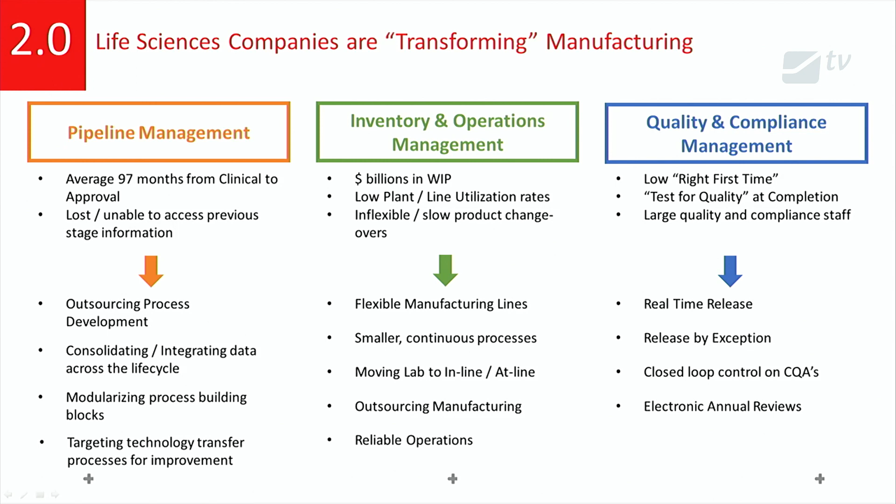I put this in just to give you an idea of what we face from an automation perspective. All of this is pretty much - I don't know whether you've heard of or are aware of Industry 4.0 or digitalization - that plays a large part in automation for us now and in the future. It's very broad, so no one person will stand here and say we understand all of this, we know it all, we can do it all, and we deliver it all. But there are key contributing factors in there.

So data or Pharma 4.0, around the interconnectivity of devices, around collecting data, around vertical and horizontal integration of data, around smart visualization, so how you can actually see and use data and information. These are all integral parts of Pharma 4.0.

Virtual reality, digital twin, being able to replicate things in a digital environment or superimpose digital onto the physical world, using artificial intelligence, knowledge-based systems, self-learning systems.

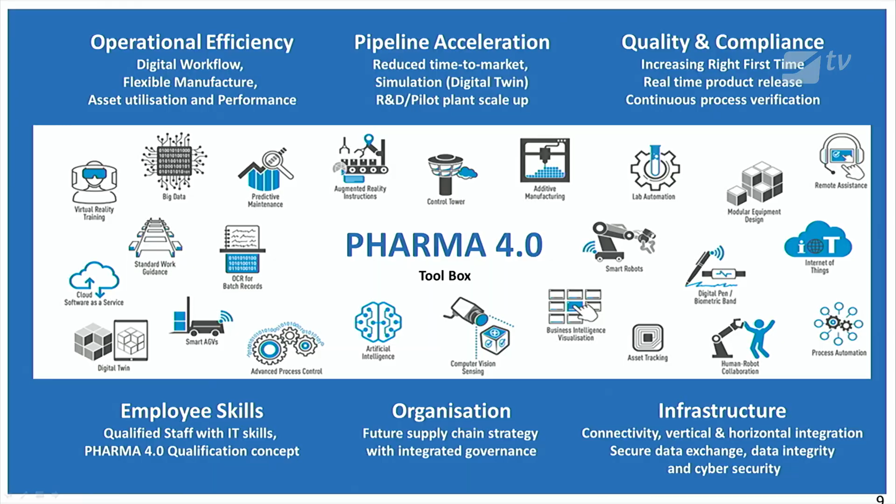They're all factors, they're all enabling technologies, but ultimately they're supporting some of the key drivers that our industry sees. Operational efficiency, so using data, digital workflows, around flexible manufacturing, how we can, and I'll touch on this a little bit later, around asset utilization.

Being able to simulate and use digital asset for scale up and quality and compliance. Just, it gives you a flavor of what we're using to support overall improvement.

So why automate? Well, some of these are technologies that are available now that are making the automation more effective, having a greater impact. So everybody sort of talks about the cloud, around making all of this data available at a higher level, and then being able to perform data analytics on it, being able to visualize.

Virtualization, the power of computing now means that we can put a lot of resource in a single machine rather than having an enormous footprint.

Visualization, so being able to look at and view data. It comes back to sort of the millennials of today, where they've got smart devices, they can look at whatever data they want and they need it when they want it, wherever they want it. Rather than having a fixed screen somewhere in a stainless steel panel.

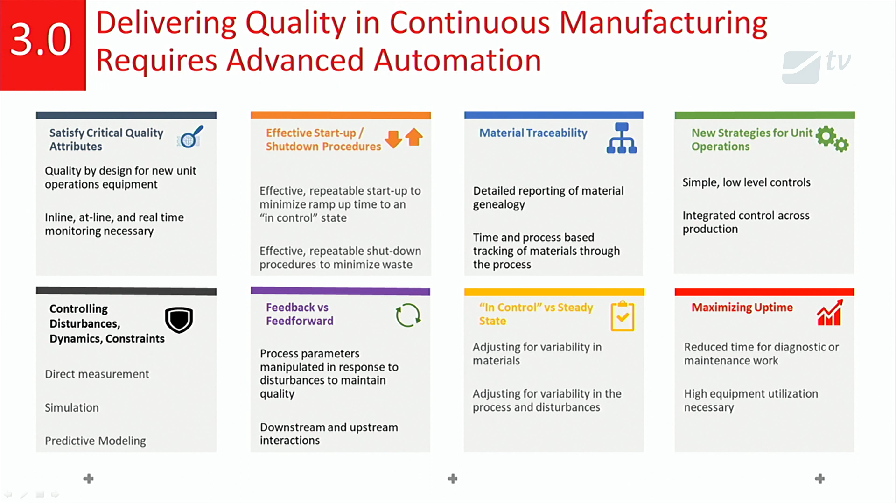So what are the benefits of automating the process? Well, firstly, being able to integrate a system, having a common platform to work on. So the same look and feel, the same sort of visualization, the same data, minimizing the training, being able to take development from a conceptual stage to commercial scale.

Clearly that's a different sort of discussion when we're talking about continuous manufacture. Equipment flexibility, I'll show that in a little bit more detail, but being able to extract and remove equipment where the software has to replicate and follow that.

I think a point that was made yesterday as well, and it's something that we're working on at the moment, is around common integration, so around standards, around how we can connect devices with the minimum risk, so taking a complete validation approach.

Compliant, logical and defensible position, so basing the development on standards, on known principles, on known practices, on tested and modular pieces of code. Material traceability, being able to track and record exactly what component parts made each of the batches, and having a robust system that records that, including batch reporting as well, so almost inherently and automatically generating that for you.

Minimal customization, so I think Lawrence touched on it yesterday, and it's something that I'm quite keen on as well, is taking the equivalent of an S88 model, so building a modular software structure that's fixed. It becomes a library function, so when you reinstantiate that, it's the minimum amount of effort to be able to redevelop or recreate. And that's completely compliant across the whole system architecture. So now we're talking about one system across the whole of the manufacturing process.

User-friendly, so a little bit softer, but it removes the risk of error, where it's the same look and feel across the whole software platform, not different platforms with different operator interfaces. It's all exactly the same. You can start the process from a common place because it's all integrated. And if need be, it can be a single place too. So all the data is available. It's a single place to review and monitor the process.

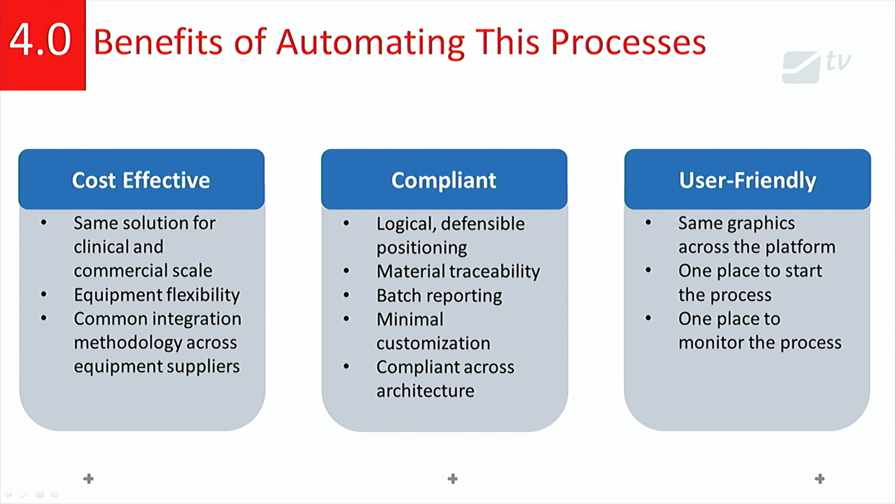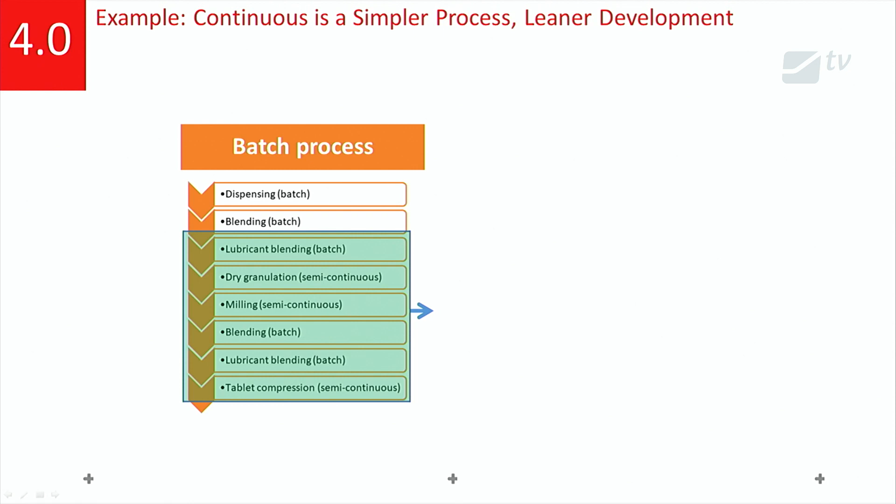I'm not going to go through this in too much detail because I think we've seen this sort of picture a lot of times. But the point I'd make here is that, and I think Frank touched on it as well, is that where you end up with almost potentially a hybrid system of batch, semi-batch, and continuous, is having the capability to take data from all of those unit operations and store it in a common place, but it's contextualized. It has the right context so that subsequent analysis is possible.

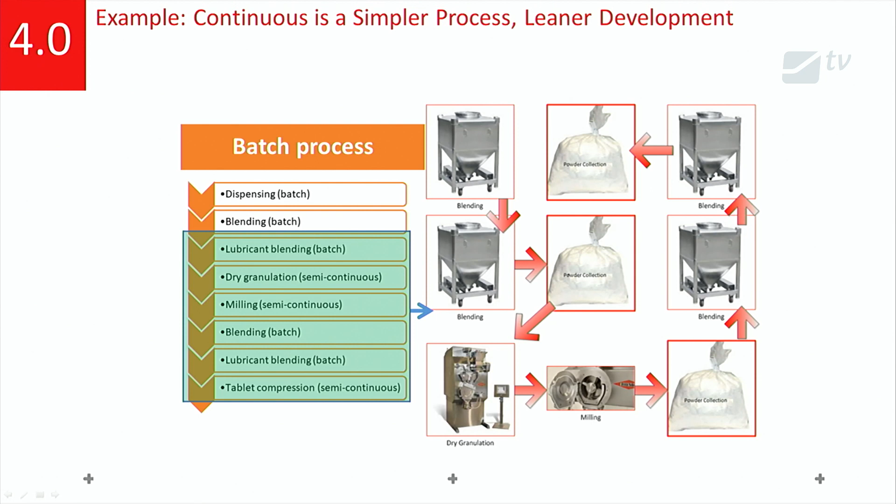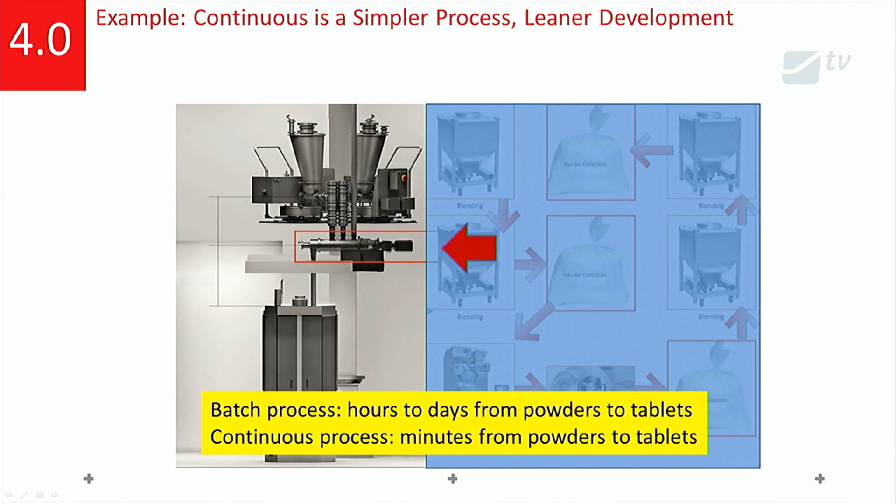Across all of the different units and unit operations. And again, we've spoken about this a lot, but the simplicity of continuous processing against batch brings the processing time right down, but it's having the data available to analyze that.

So we come to this point where we've now got, or been able to embed a lot of analytics in a multiple of different controller devices, but they're all complementary. So now we've got an awful lot of information, but it's all connected, it's all working together, it's all dependent. There's an awful lot more level of detail in order to understand what's going on in the process, but also in terms of advanced process control, to understand how each of these different components interact with each other. And I'll show you an example, a very simple example, by the way, in a minute.

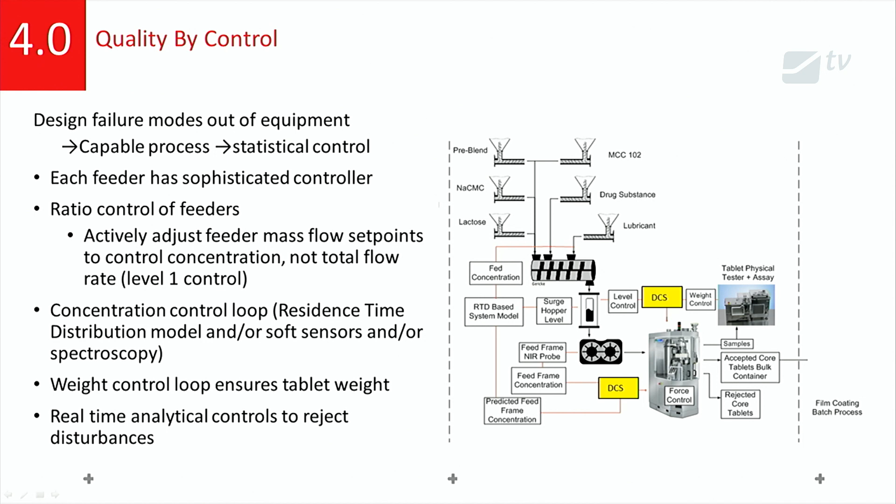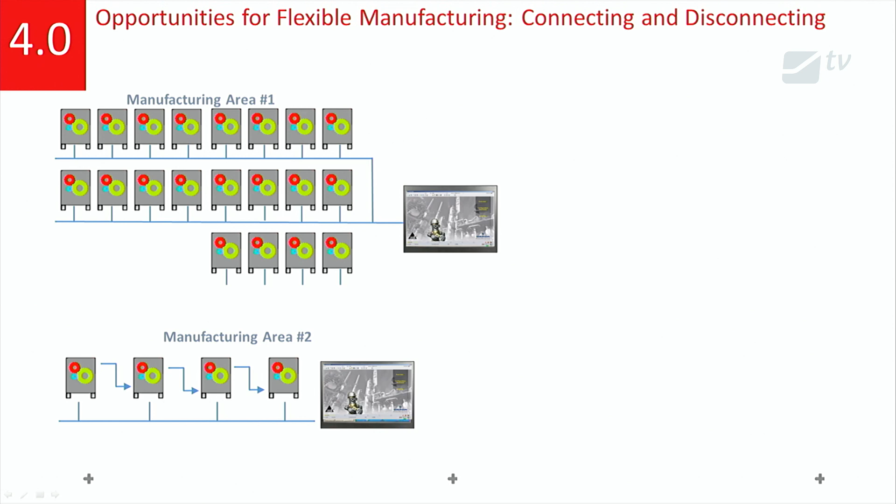In terms of flexibility, we've seen this quite a lot, or we talked about it, but being able to create components, units, and modules, and take them out and remove them, or use them somewhere else, or be able to reinstate them. The same thing has to happen from a software point of view as from a hardware point of view. In most automation systems now, if we have a common platform, we'll have a common library. The common library equipment classes can be tested, can be validated, and therefore can be reused. It's the same with the interfaces, having common standard interfaces. So being able to remove a piece of software or a module with its inherent software with the minimum amount of rework required. Again, it comes back to the philosophy of S88, so having standard functionality and standard interfaces.

So it comes back, we would talk about the plug and play standardization, and that's something that we are actively involved in at the moment, working out how best to do that from an equipment point of view and from a software point of view. There are solutions there now, but they're probably not as elegant as they're going to be as the technology develops and standards move on.

And again, being able to take the data and collect it and have it in one single form or one single place, irrespective of where you've used the equipment and where the product is.

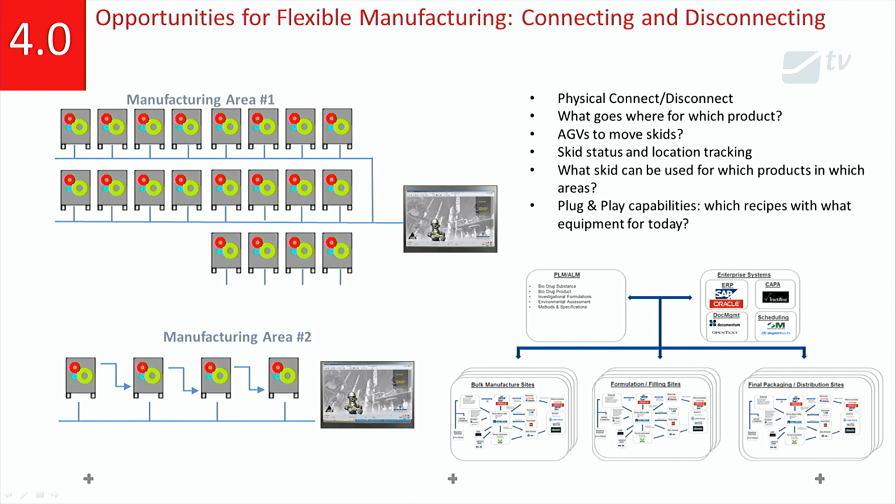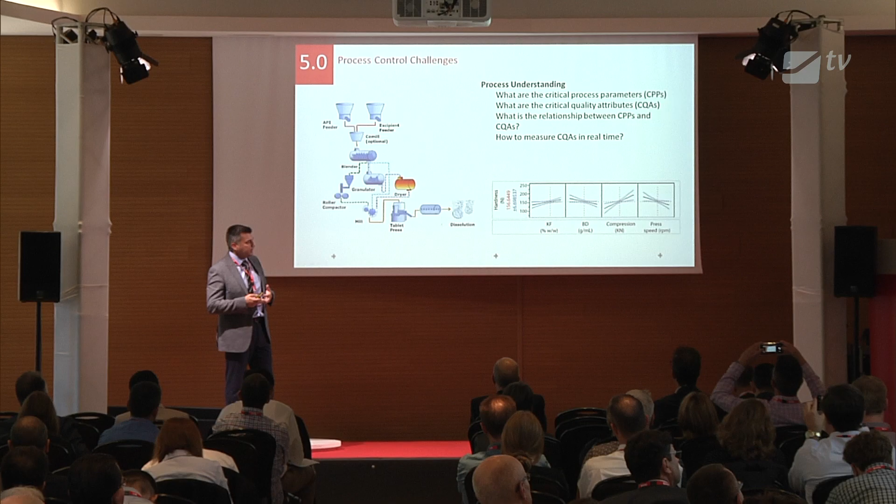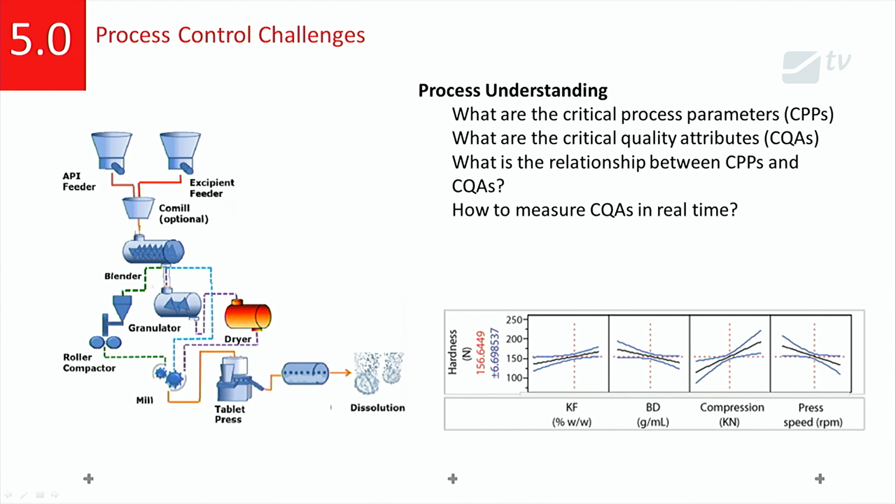In terms of control strategy, I just wanted to give you a simple or a very basic overview or example. So in this example, we want to be able to manage things like the optimum product, tablet hardness, blending consistency. But in order to do that, we need to understand what the critical process parameters, what the quality critical attributes are, what relationship they have to each other, and how they're actually going to be measured. And again, we've talked about sort of modeling a lot this morning, but it's essential to have that level of information.

There are challenges and complexities from an automation perspective in that there may be multiple critical process parameters, there may be multiple quality critical attributes, and they all have complete interdependency on each other. But at the same time, they've got to keep the product within the design space. There's also the added complication of process variability. But from an automation perspective, how do we accommodate that?

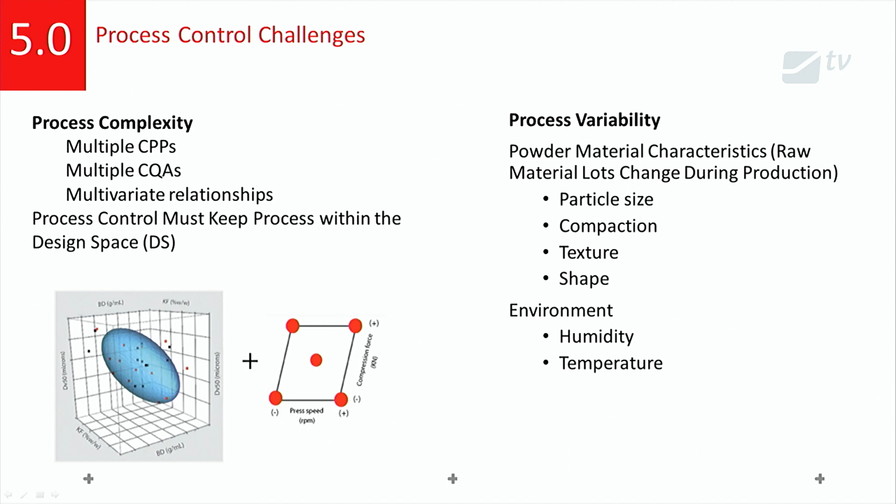So data density, information per kilogram of materials, I think that's great. There's a level of adaptation, so we can use that data, we can optimize models for much more consistent control. And in a specific case, 100% of the product can be inspected and measured. So what do we need to do to make this happen?

So we need to develop our prediction model. We need to be able to measure the frequency at which we're going to use our detection equipment, our analyzers, derived from the residence time distribution, just to make sure that we capture at the right frequency, at the right rate, the right information. Data management - how do we need our system to be able to manage the models, to be able to manage the data, to be able to perform on the predictions that it's creating in the controlling devices.

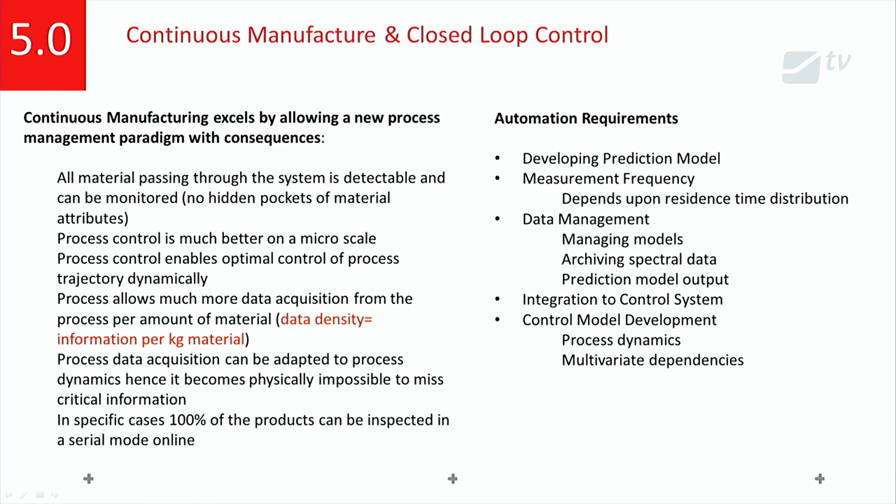Has to be integrated to the overall control system, and then we need to be able to implement a control model to take into account all those variances and dynamics. So, fairly simple system. Fairly basic architecture, to be perfectly honest, where a DCS will run all of the controlling software. An analyzer will be able to detect or measure the process performance, and an interface to the actual controllers of each of the devices.

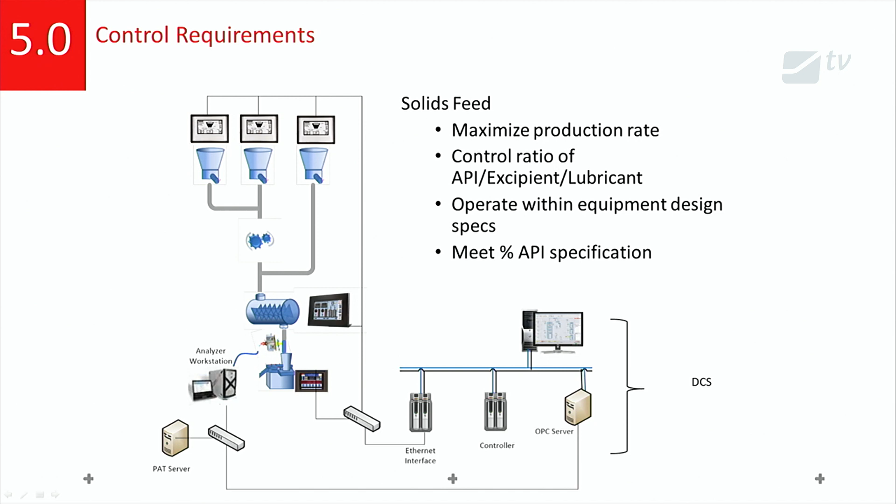We need to understand what the control requirements are. So we want to be able to measure or maximize the product rate. We want to be able to control the ratio of the API, the excipient, the lubricant. It's got to be within the equipment specs, and we want to be able to meet the percentage API specification for the feeders.

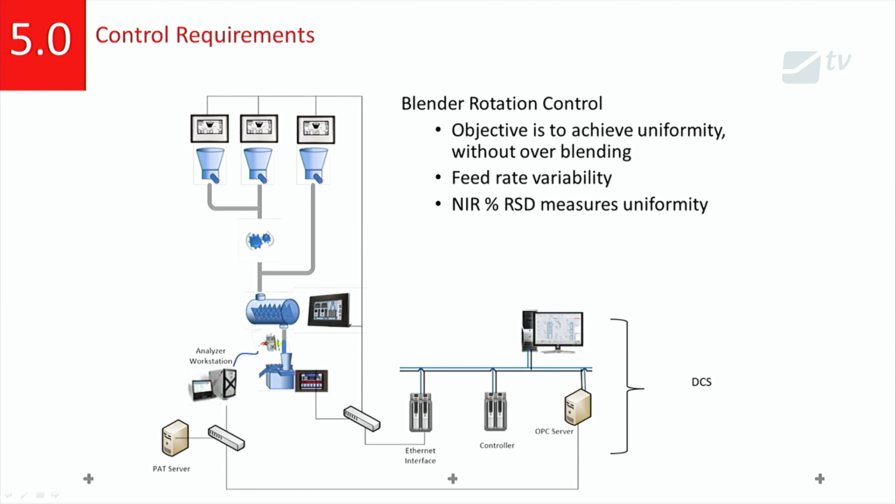For the blenders, it's all around uniformity, and to be able to accommodate feeder rate variability, to be able to measure the actual product uniformity. For the tablet press, the level, the compression, and the weight of the tablets. So these are all parameters that need to be taken into account by our control system.

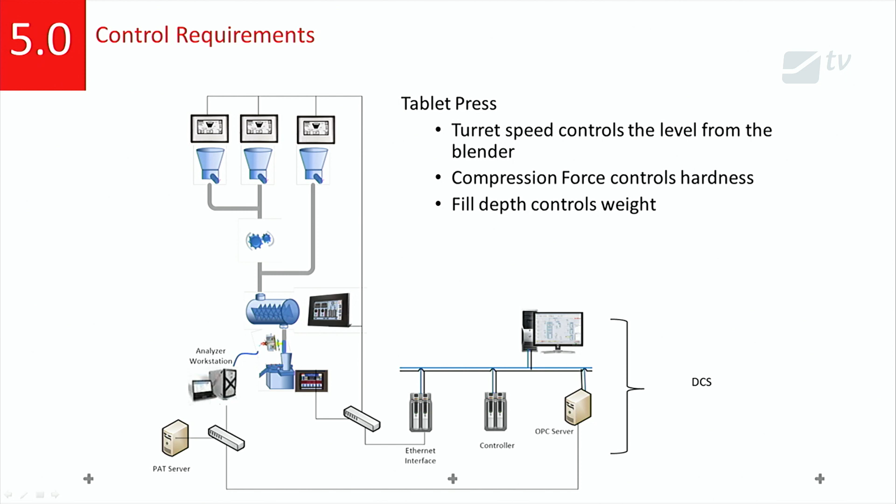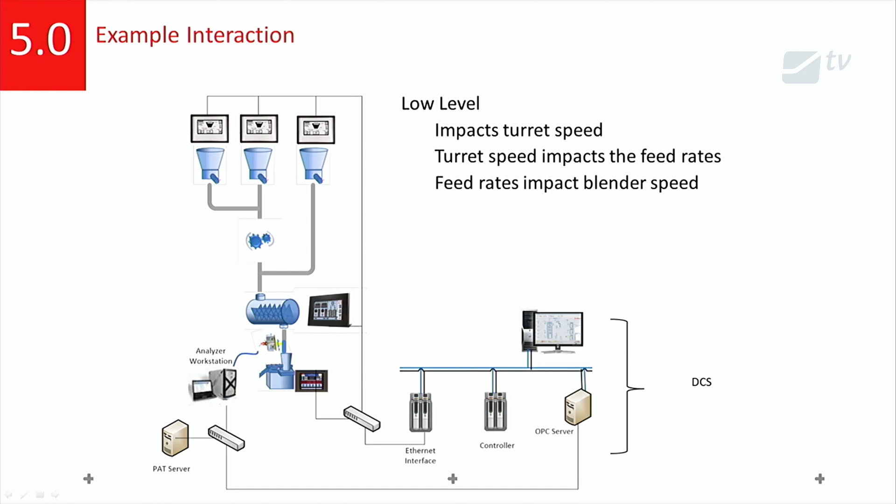And then, of course, all those are independent or interdependent. So a low level in the compression machine affects the turret speed, affects the feed rates, affects the blender speed. So it's all interdependent.

The way that we look at doing this is around - if we took conventional control, a reactive control where the output of a controller is directly proportional to the input or the error that it's measured, it's very difficult to do that with the interdependencies that we've just described.

If you take a multivariable predictive control approach, you've now got the opportunity to take all of the related measurements, integrate the measurement outputs, and then determine what dependency they've got on each other. So it takes into account the interactions of each of the measured values. It takes into account the modeling and the prediction of what potentially is going to happen to each of those deviations, and it also gives an element of optimization.

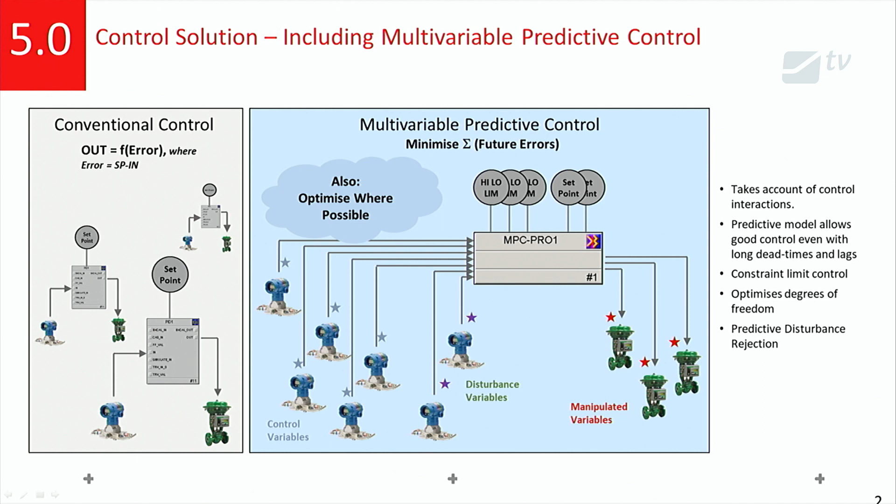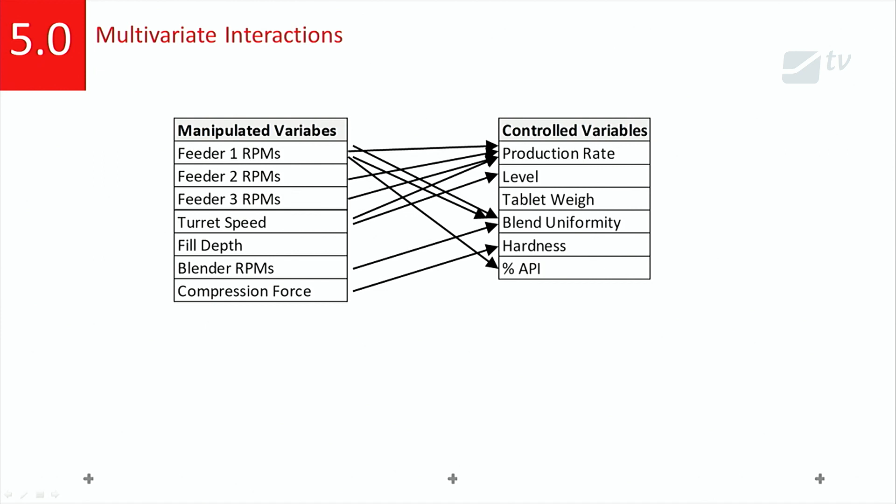So from that model as it is now, we can run it. The model can be optimized. We need to know, for example, in this example, what the relationship is between all the measured variables, or the manipulated variables, and the controlled variables. Without that, we've got no multivariable control. Again, this is a very simple example.

Once we know those, we can plot those in a model predictive controller - a dynamic control matrix. So within here, we can include every single relationship and every single effect between all the relevant process inputs and outputs. Looks very simple there, but it's quite a challenging task.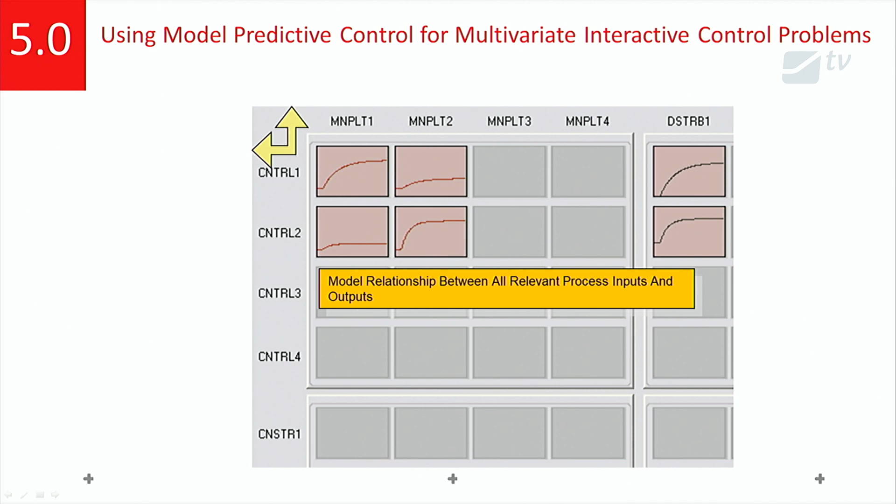So ultimately, once we've built that, we've now got our model predictive control on our system. So everything that we've described now lives in a model predictive controller, but it manages all of the other controls, all the other parameters. So the flow for the feeders, the pre and main compression forces, the fill depth, the fill weight, are all now directly linked through a model predictive controller.

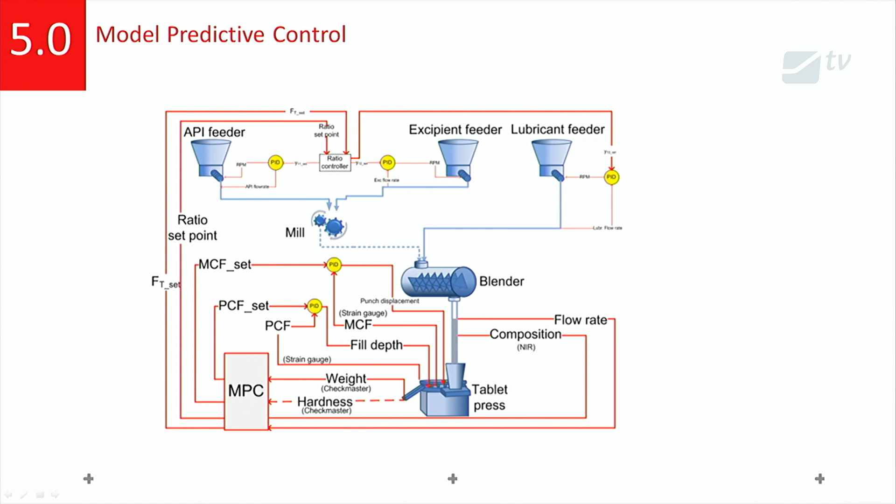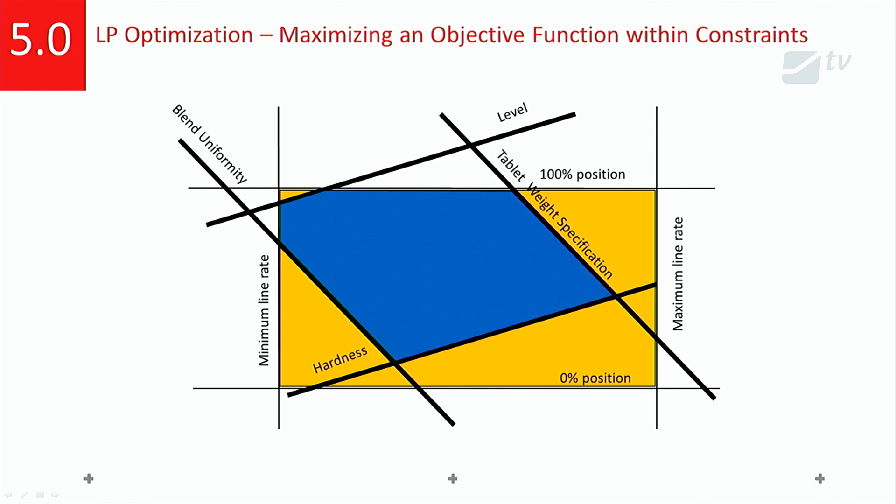Using this, we can use an algorithm called linear programming, and it interprets all those rules and extrapolates based on the performance characteristics where the optimum operating point is going to be, based on the manipulated and controlled variable limits. It can't take you outside of the limits, of course. The system can only do what it can do. But the idea is that based on those requirements, the algorithm will work out exactly where the optimum operating point is.

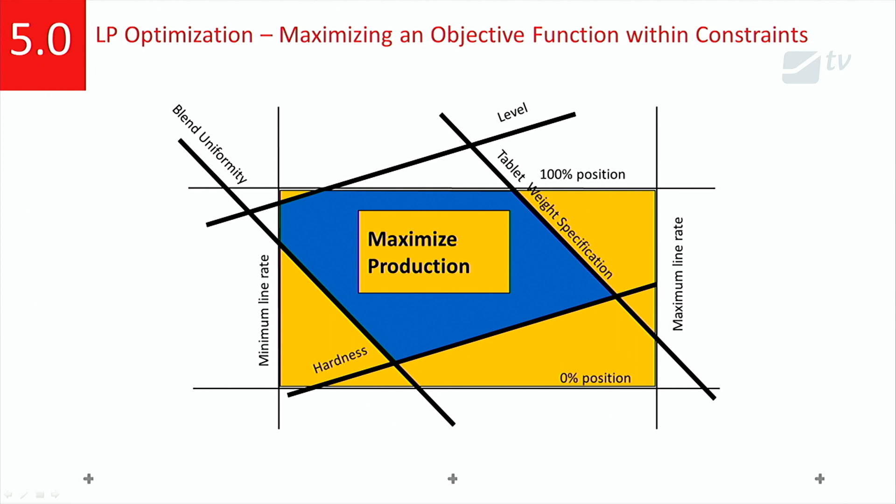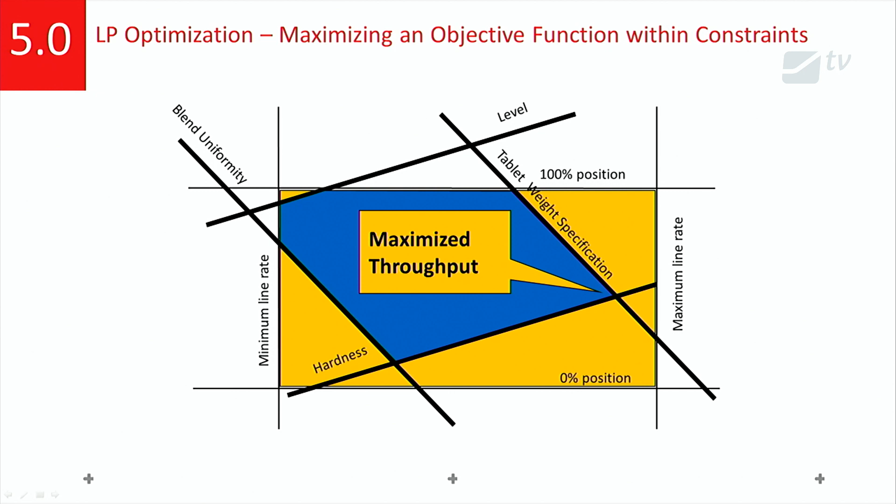It's normally at an intersection between at least one or two of the lines. So in this instance, we've maximized the throughput given the constraints that we've got. Great, maximizes profit, of course.

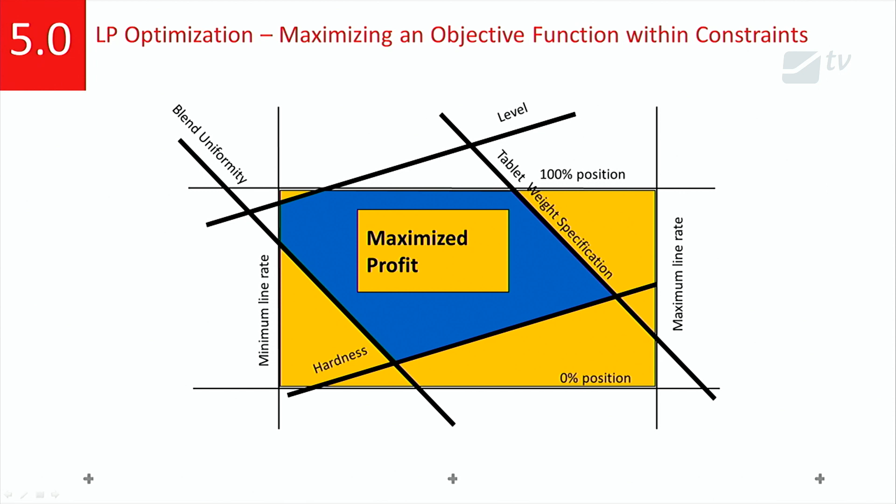But that's not always going to be fixed. For example, it may well be that the operation is around throughput and energy, where there's a compromise between energy and throughput. There might be times where you're behind on manufacturing throughput and you're prepared to forfeit or compromise some of the energy usage. So that model will change. It will allow energy usage to go up in order to increase the throughput.

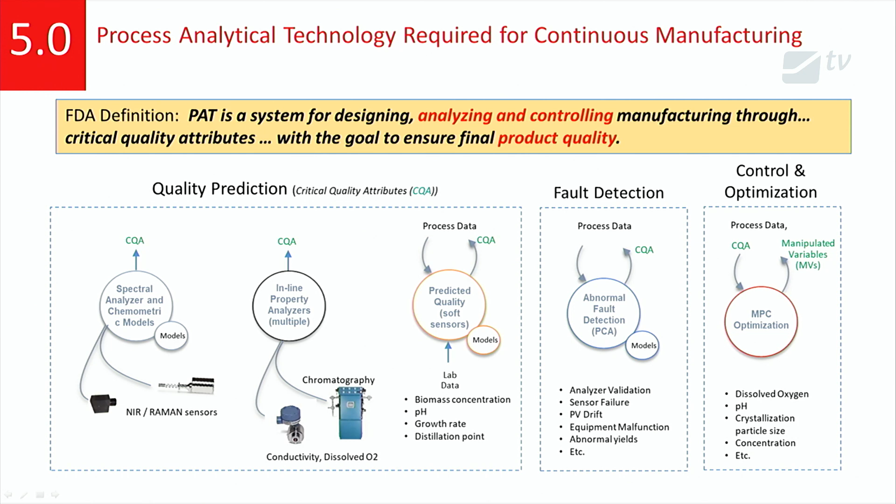I just very briefly wanted to touch on, from an automation and systems perspective, the PAT system. Essentially, the PAT system provides three types of information: quality prediction, fault detection, and then, using our model predictive controller, actually controlling the process and optimization. So a lot of functionality there and a lot of information.

We see things moving towards a more integrated PAT management system, where all of these requirements—again there's a lot to read there—but we want to satisfy those in a completely integrated system.

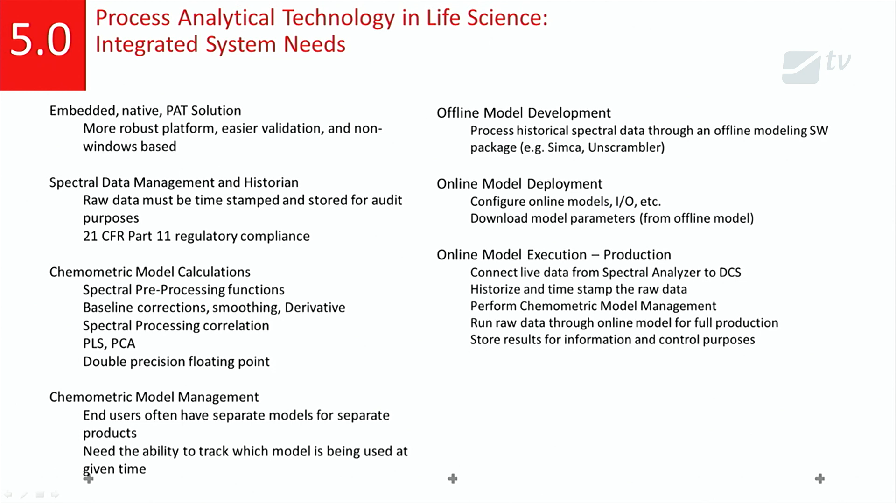Why do we want to do it? Because the architecture at the moment has room for improvement. It can become better. It's made up of quite a number of component parts, a number of different databases and different controlling mechanisms. So for us to deploy, it makes it quite challenging. It's difficult to implement, fairly difficult to maintain. It potentially has two sources of truth, or a different number of batch records. It'll have different operator interfaces. And the perception is, as we come back to cyber security and things, it's less secure.

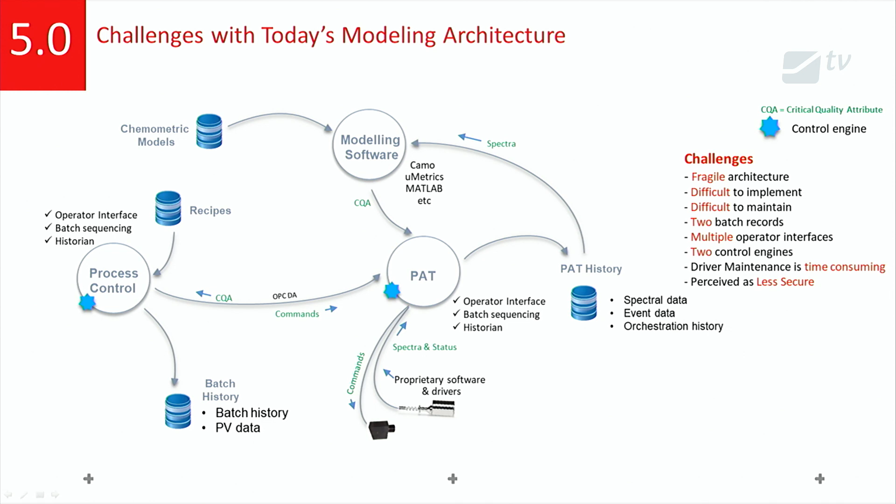And in terms of the automation levels, this is what it looks like. From the source of data all the way through to being able to analyze the information, there are a number of interfaces and a number of places that the data can reside.

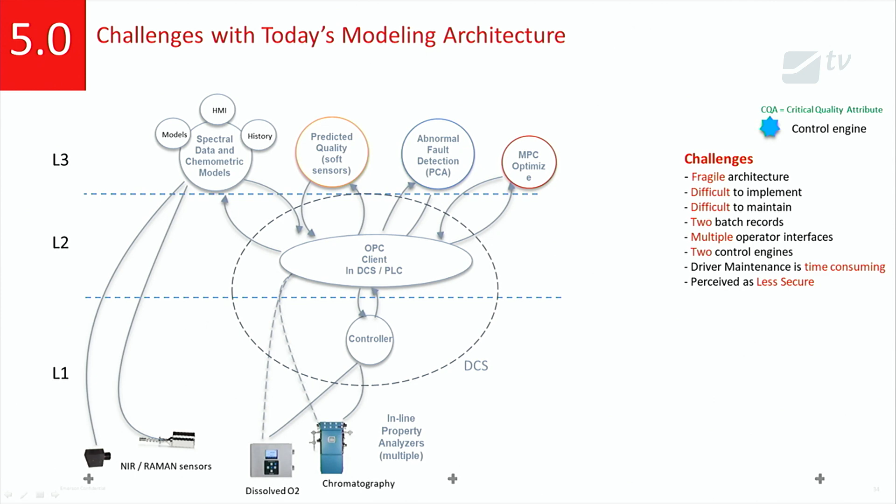Where do we see it going? As I say, the technology is allowing it now to be a much more integrated system, so everything in one place. It's easier to use, easier to maintain. We standardize on models and libraries because it's all there in the same place. But it's not quite there yet. It's still work in progress, still around innovation.

We'd like to think, and I think it was mentioned yesterday, OPC-UA is the interface, the universal interface moving forwards, but not everybody has that right now. Potentially there's no raw data around because it's been brought in and processed. And it's certainly not proven in the market just yet. But it's a vision, and it eliminates a lot of the challenges that we saw previously.

So there is a single place for operator interfaces. There isn't any duplicity of operation. It gets rid of any driver issues and data management issues.

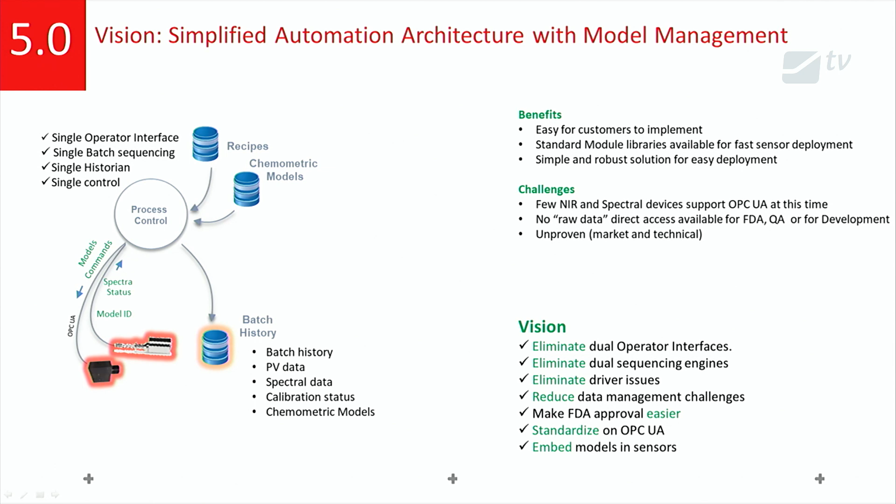The other point is that we've looked at how do you embed different models for different sensors. So sensors will now be integrated at the controller level, not through its own server. But again, not there yet, but this is a nice to be, this is where we would like to be. And what does it look like? Same functionality, but it's all now being pushed down into a controller level, so it becomes one piece of software.

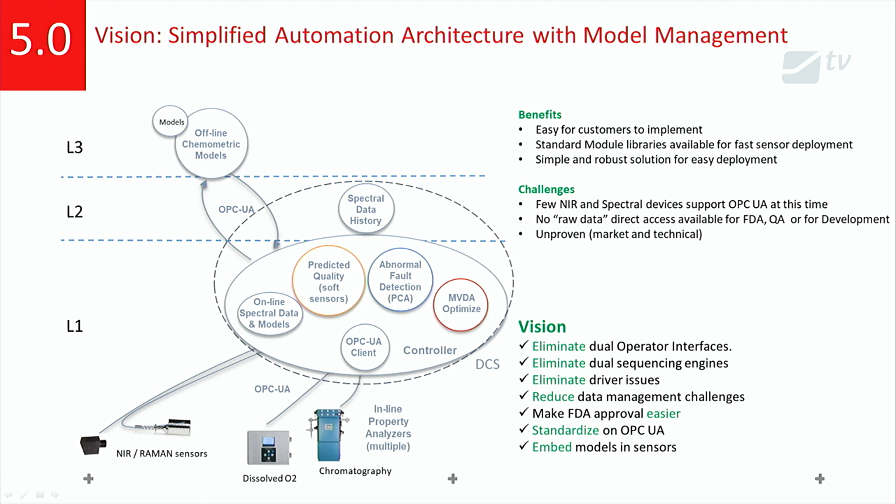This comes back to what I was saying earlier around how do we manage the challenges around using different unit operations. There's variance between all of the unit operations that we spoke about earlier. There's the challenge around coordinating unit operations—if they sit in their own entity with their own controllers, then there's a challenge around how do you synchronize those, how do you schedule those, how do you interface to them. Batch reporting, so how do you take data from each of those different devices or controllers and integrate it into one single homogeneous database?

It becomes challenging around tracking and tracing materials for consumption through a whole process. But if we start looking at a completely integrated control system, a lot of those issues start to move away, where there is a standard interface. It reduces the challenge around interfacing and gaining data, bringing it into a single place. Clear boundaries of accountability, so it becomes very clear in terms of system delivery who's responsible for what and what standards they're going to use. There's no gap in the middle, where we've worked on projects before where everybody's comfortable with their own bit, but how do you plug it all together?

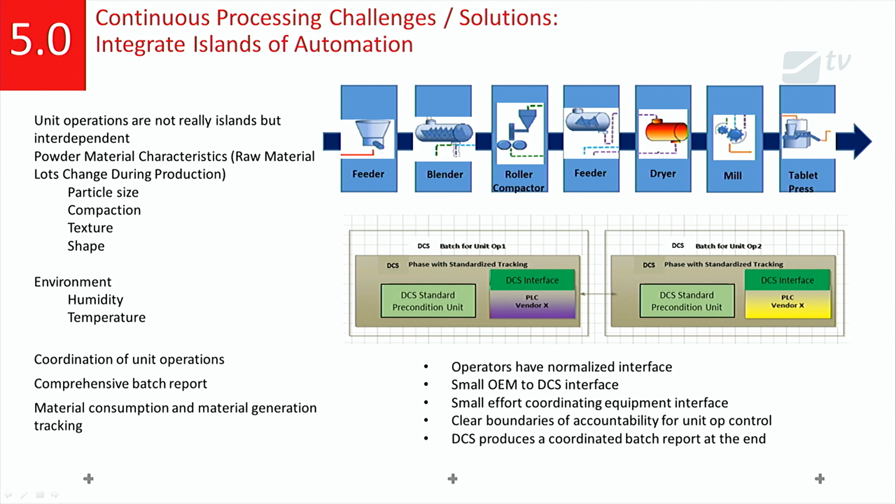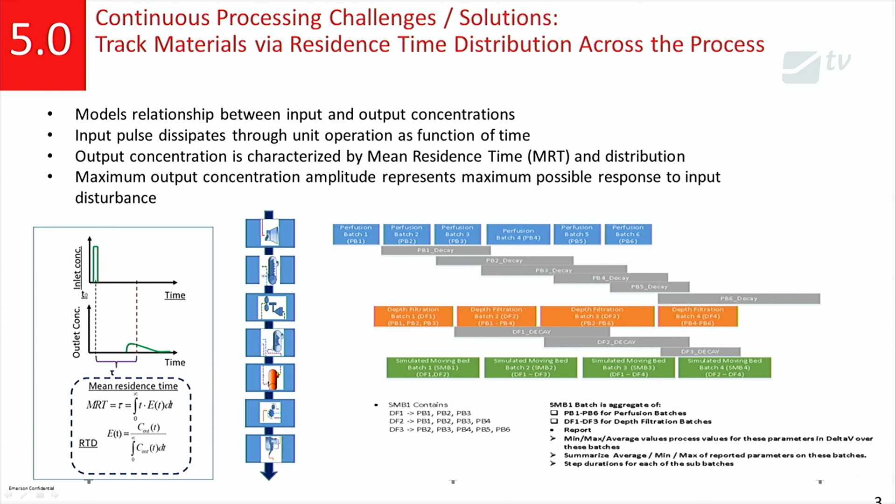We've heard an awful lot about this, so there are people who've done a much better job than me talking about residence time distribution. But what I'd say is from an automation point of view, it's really important for us to understand batch definition. Where does a batch start? Where does it end? Where potentially does it cross over? That helps us with material tracking, and it also helps with the frequency of analytical equipment, knowing how quickly a product is moving through a system. So it's one of the key attributes of controlling the process.

Similar thing with validation. We've suggested a two-step approach to that, where each unit is validated in its own right, using their local multivariable control. But once that's been satisfied and done, we do a complete end-to-end validation, where we use the predictive control to understand the overall impact of retaining a steady state through the whole system.

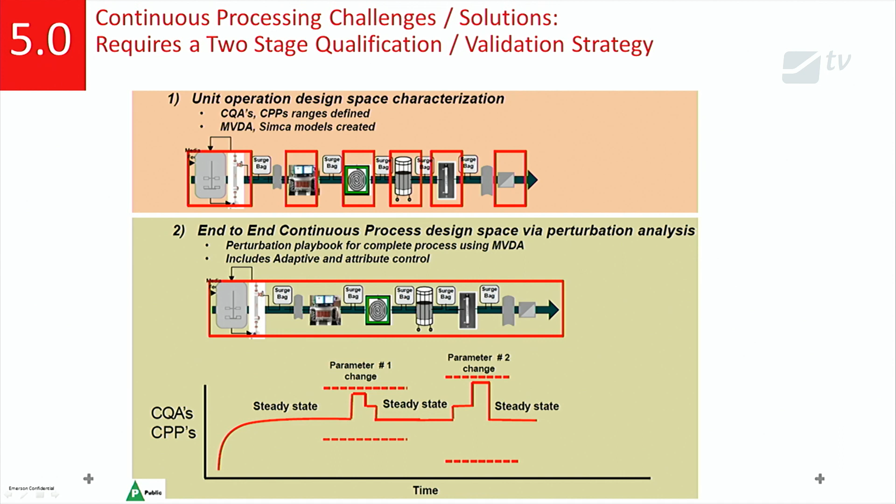And then the vision, certainly for the DeltaV system but for automation generally, is that once it's all completely embedded, you get the visualization of quality prediction. So we're making the information available to operators in order to help them make the right decision at the right time. But also fault detection - statistically abnormal operation, they're alerted to that, but it's all in the same place on the same interface.

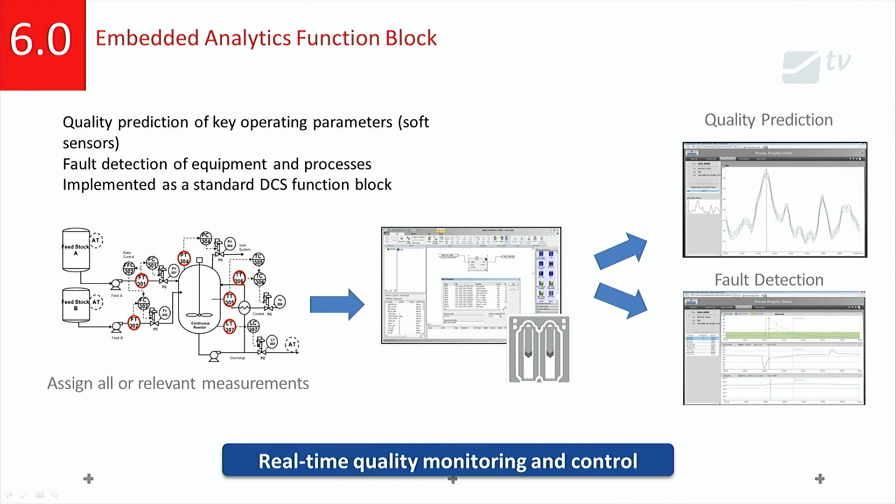So a bit of an overview of automation.